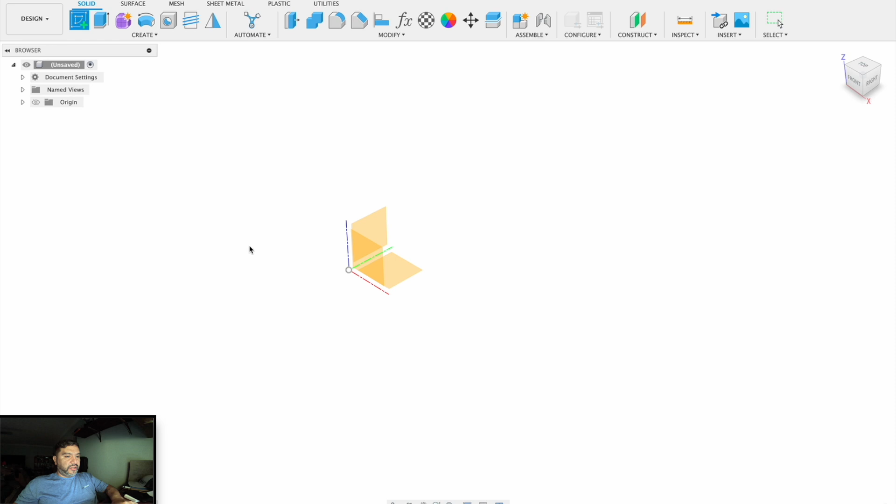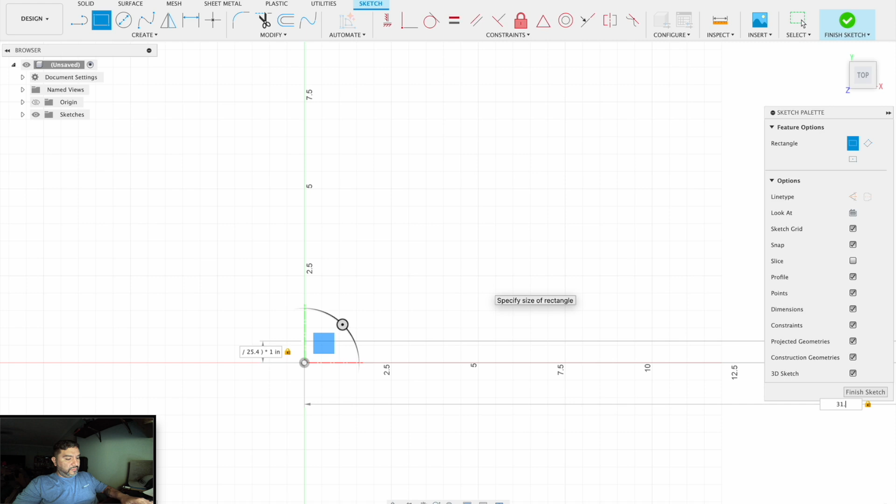The brick is a 2x4 brick, and it's in metric, so I'll be converting it to English. Short side is 15.8 millimeters divided by 25.4. Long side is 31.8. That is our rectangle.

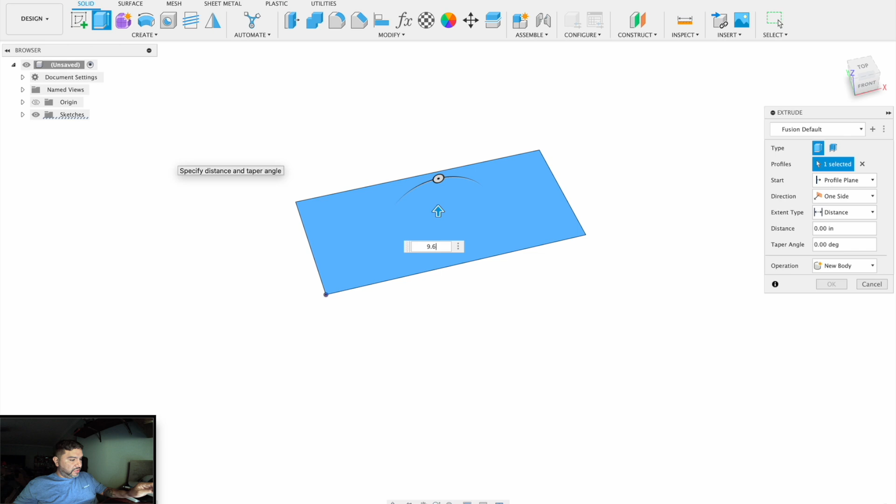We are going to extrude it first, we're going to extrude it up, and that dimension is 9.6. 9.6 in English, not metric, divided by... 25.4. Alright, there's the bases of our brick.

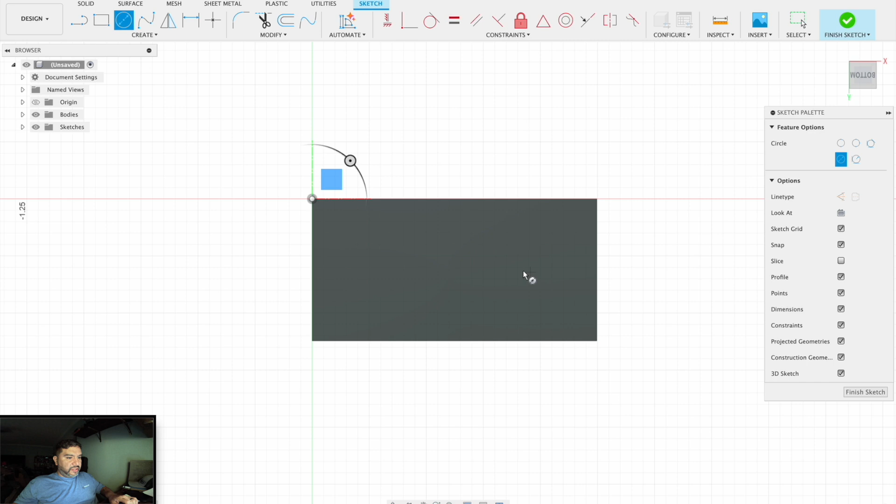Now I'm going to cut the bottom out, and the bottom dimensions are listed on this sheet. Use new sketch, select the bottom. There's a circle in the middle, so we'll drag our cursor till we get the triangle. We'll drag the other side until we get the triangle as well. When they meet, you get two lines. You're in center.

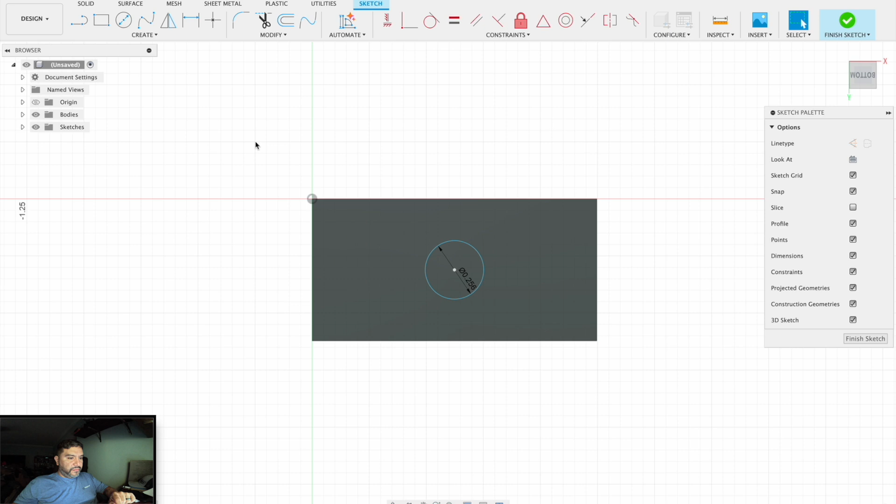Now we're going to make a circle, 6.51 divided by 25.4. Okay, you ever seen the bottom of a Lego brick? You see these circles? It'll be obvious when I finish it. Another circle, same center line, 4.8 millimeters. Okay, so we have that.

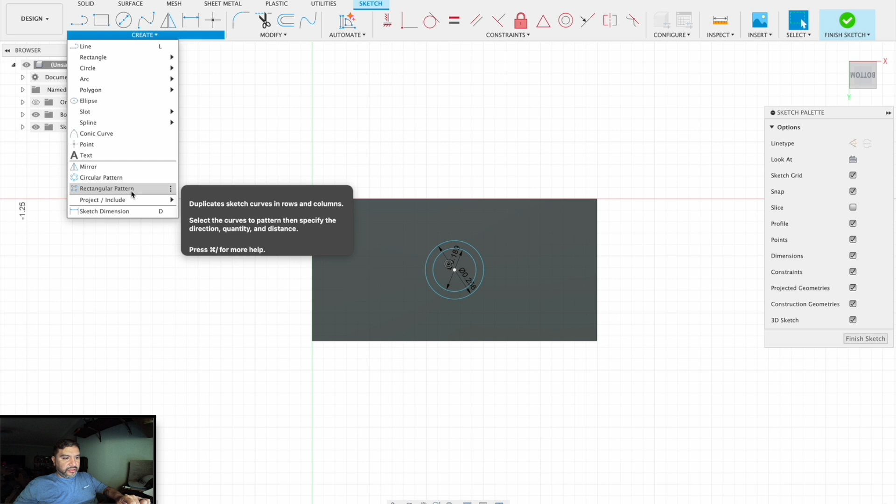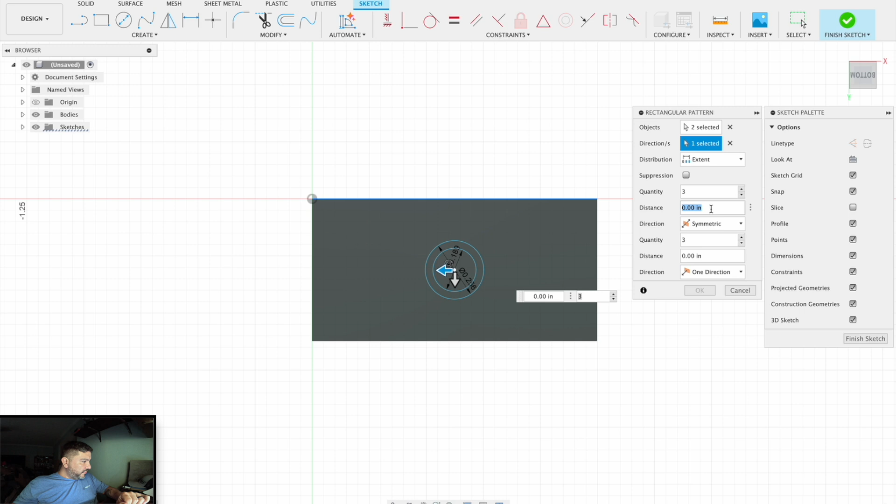Now we need 3 of them, so we'll do a pattern, rectangular is fine. Select both of our circles. Select a direction - in the direction you want, select a line that's going in the direction you want. You see the arrow here. We want 2 directions. Our distance is 8 millimeters. So we end up with that.

3 circles. I'm not going to go into the full detail of the bottom, but it'll be obvious what we're doing. Now we need to add a shell around, and the shell is 1.2 millimeters.

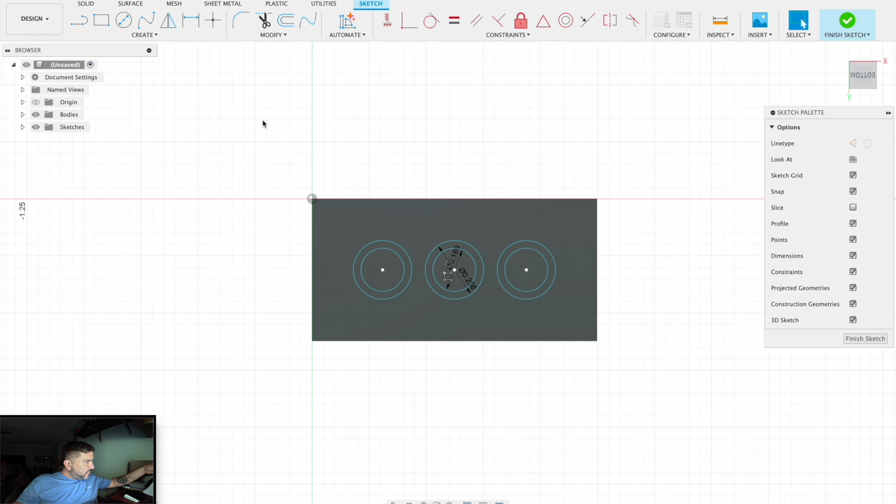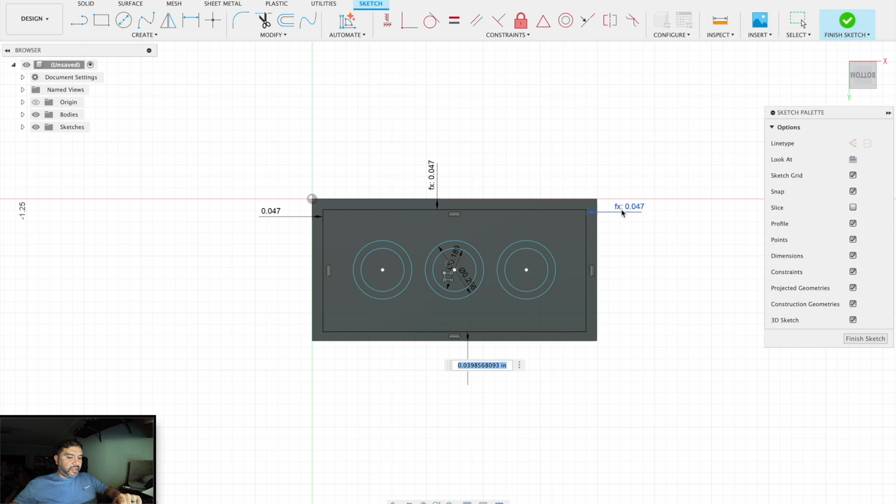Okay, so we'll take this rectangle tool again, make a rectangle here, and it's 1.2 millimeters, 1.2 divided by 25.4. Alright, and the rest of them are the same, so we'll just grab the 2 geometries we want, select the first dimension, and the FX will reference that. Same thing with the other side. Enter, and the last side. Enter. It can be any one of these other dimensions that are the same - they all reference the original dimension.

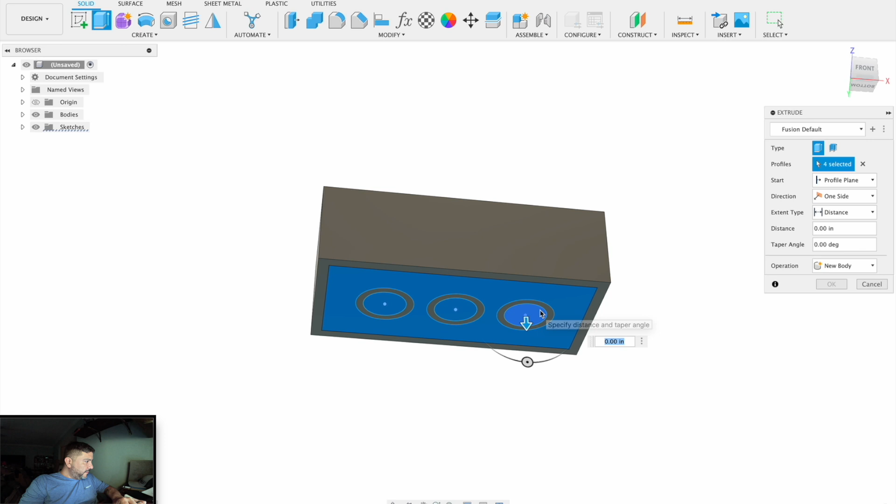So now let's pull that, or cut that area. We're selecting this. We also want to select these insides of these cylinders, and that goes...

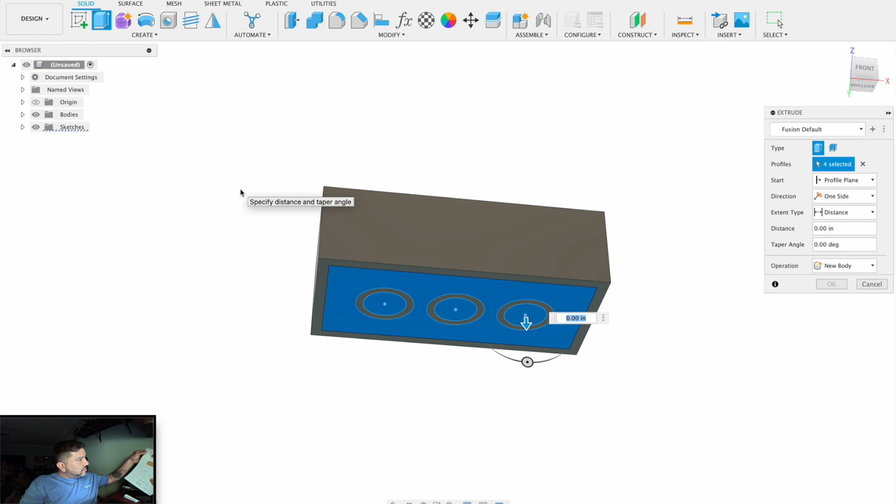It doesn't really say, but let's try 9.6 minus 1.2. Oh okay, so 9.6 minus 1 millimeter. Okay, 8.6 millimeters minus 8.6. Let's redo that. 9, negative 9, minus or plus...

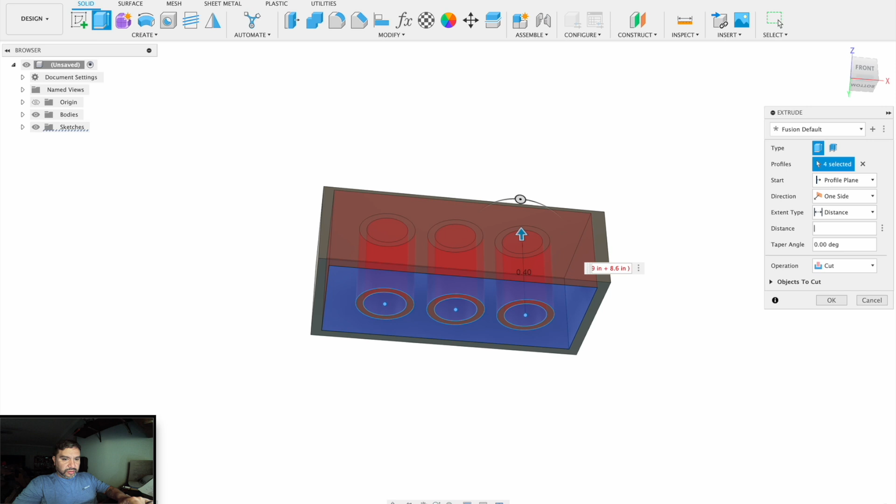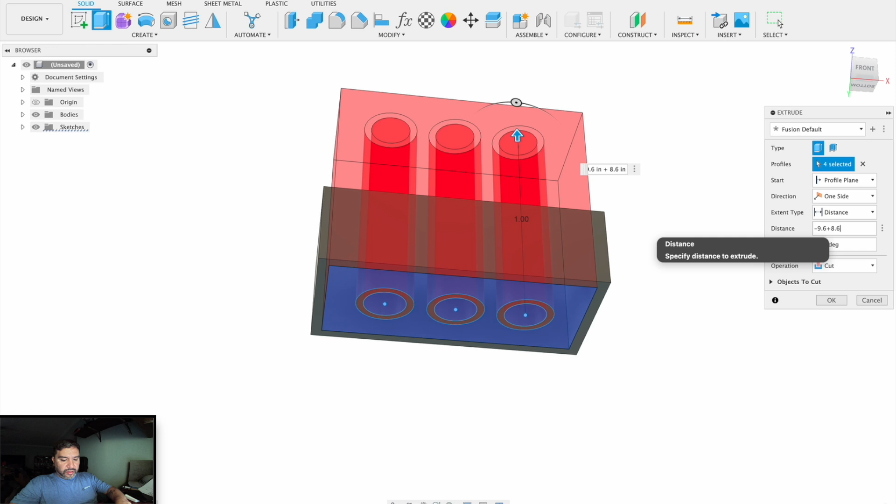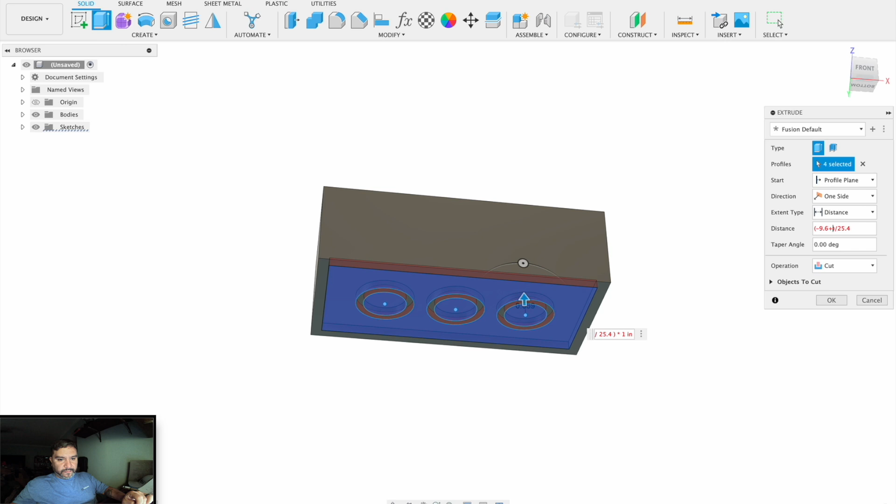8.6 millimeters. Let's take that, put a parentheses around it, divided by 25.4, which is weird, it's not changing. 6. Oh. Not sure what's going on. 9.6 plus 8.6 inches. Divided by 25.4. Not sure why I'm doing all of that - that's what we're doing. Okay, could have just did 9.6 minus 1, would have been 8.6 deep, not all the other math. But we have the inside of a Lego.

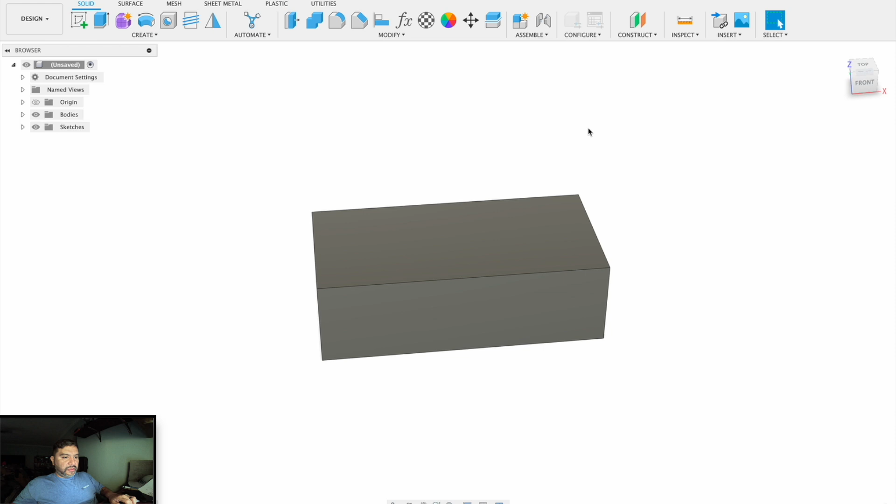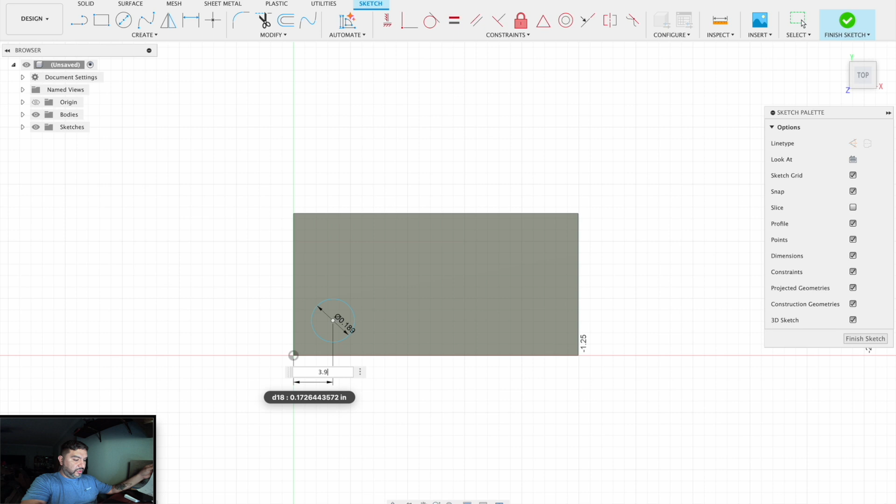So let's make the top cylinders. We'll scroll to the top with a new sketch, and we'll take one cylinder, and one cylinder is 4.8 millimeters, and it is 3.9 from the edge. 3.9 divided by 25.4, and then the same distance both ways, 3.9 and 3.9. So we'll just select the other one.

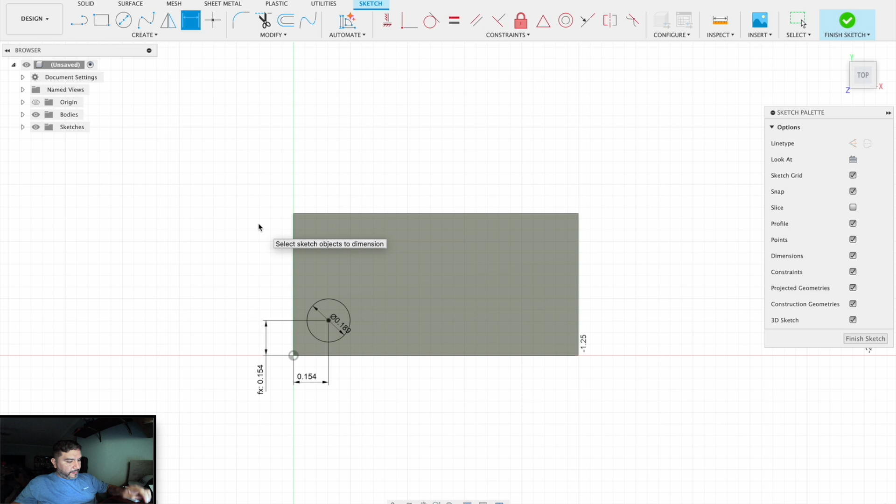That's good, and the little castle thing is 1.8 tall. So we'll go extrude, select that, and we're going 1.8 millimeters up. 1.8 divided by 25.4. There's 1.

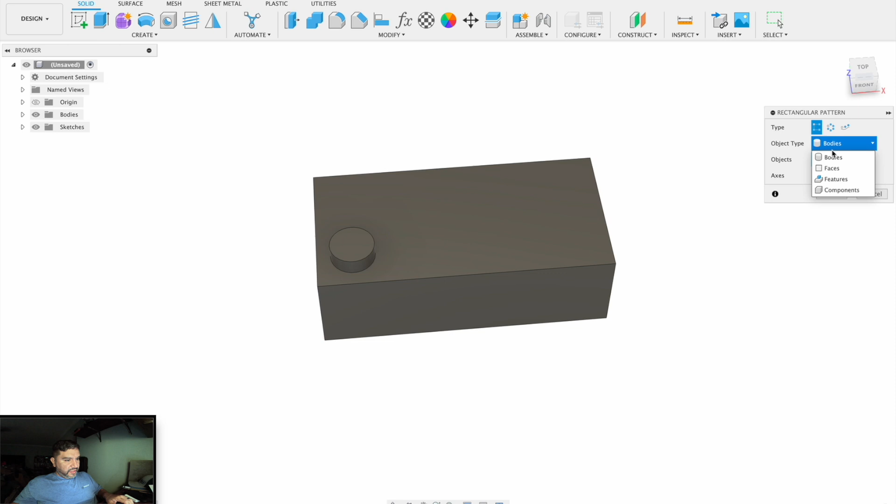Now we'll do another pattern, rectangular. We'll select faces - select the top face and the side wall. And the axis, this axis. And we want 4. We want the spacing to be 8 millimeters.

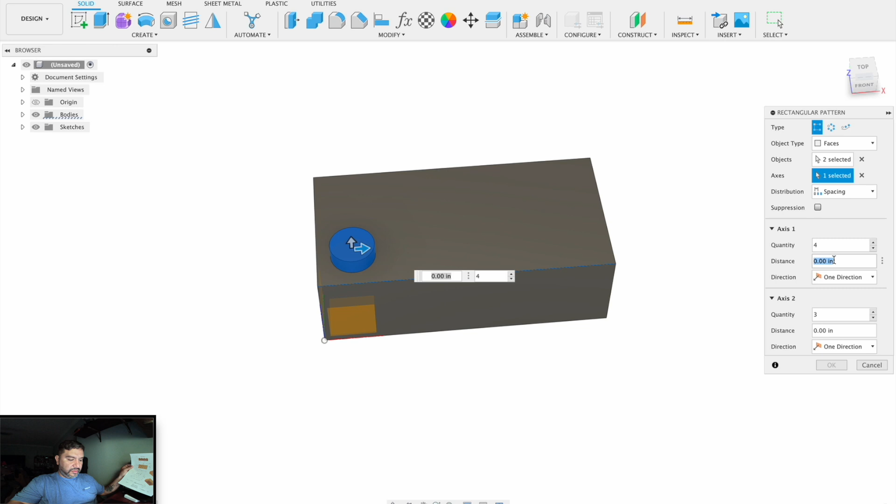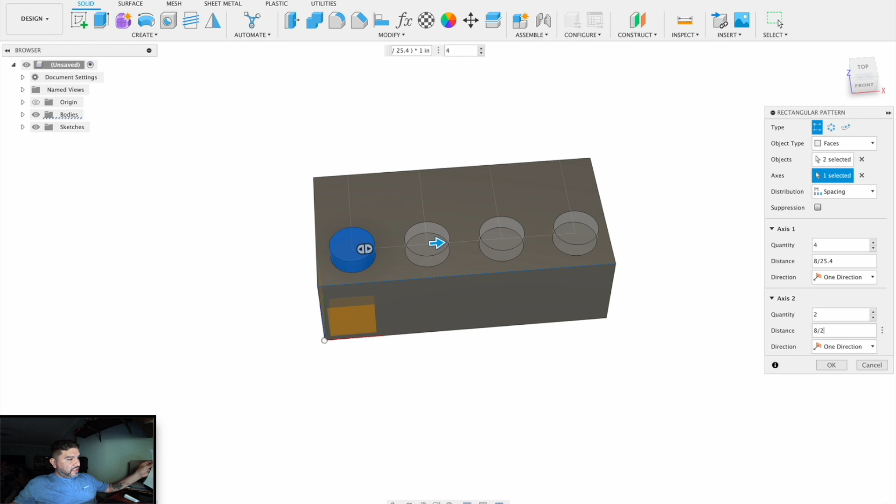Okay, now we want 2 the other direction, and that's going to be also 8. So 8 divided by 25.4. There's the top of the Lego brick. That pretty much is it. That's one simple 2x4 brick. Let's color it, make it an actual component.

So what I did there was go to the bodies, select the body you're talking about, and make it a component. Usually with components you can do a lot more things than just having regular bodies.

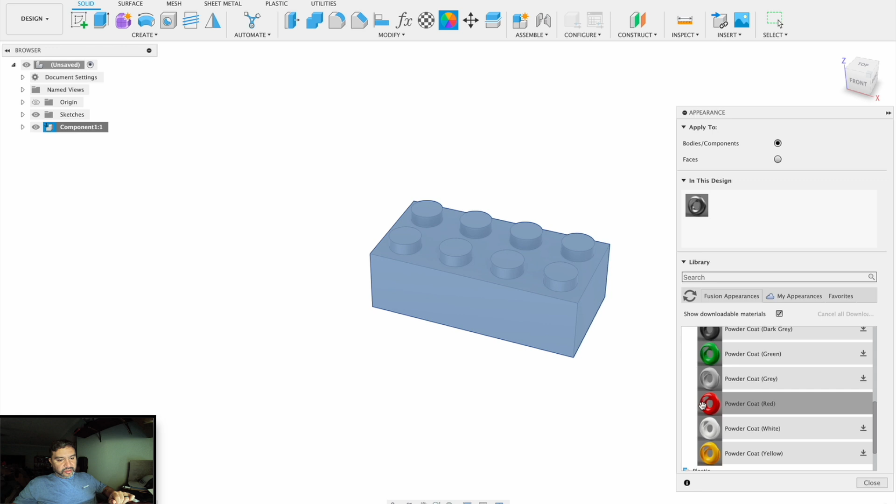We'll take that, right click and go to physical appearance. Let's make it a classic red brick. We'll go to paint, and powder coat smooth, a red brick. Download it. See a little hand? Grab that and drag it on top of your component. Now it's red. That's great.

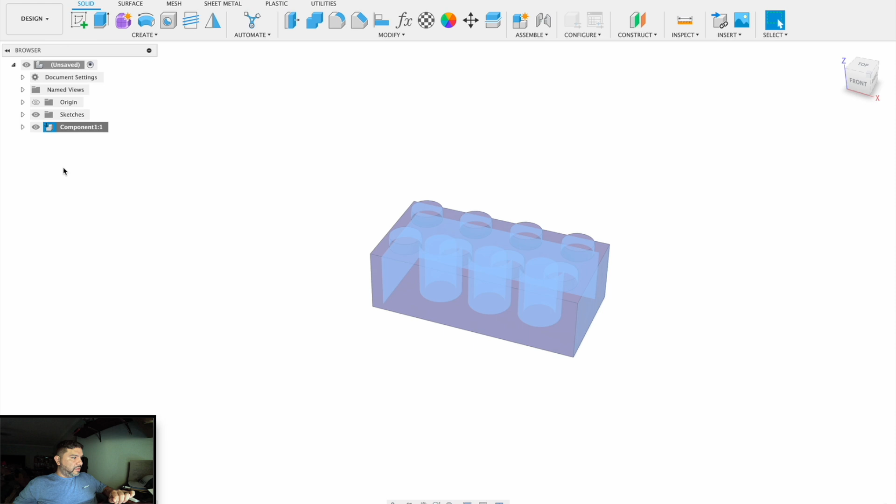So let's duplicate this part. Right click on the component. Copy. Just underneath it, right click again and go to paste new. You don't want to just paste, because all the changes you make to the first one will go to the second one if you don't paste new. Paste new makes it a separate component.

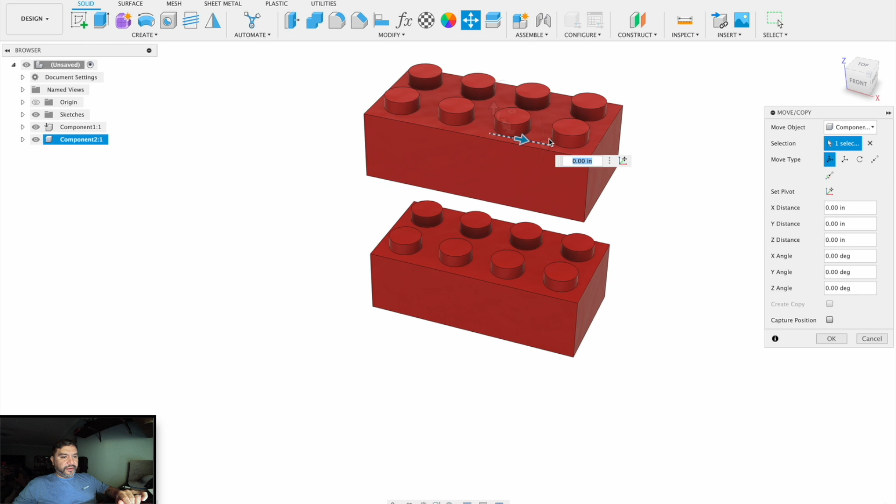Drag your arrow up and over. Let's make it some way out here. Press OK. Now we have 2 bricks in space, which the point of this video is to align things.

So let's take the cursor and go to align. It's this little icon with 2 different color bars, and you want a component. I guess you can do bodies in there too, so we didn't have to do that component switch. You want to align this edge to this edge. Now when you look at them on the side, they're lined up perfectly.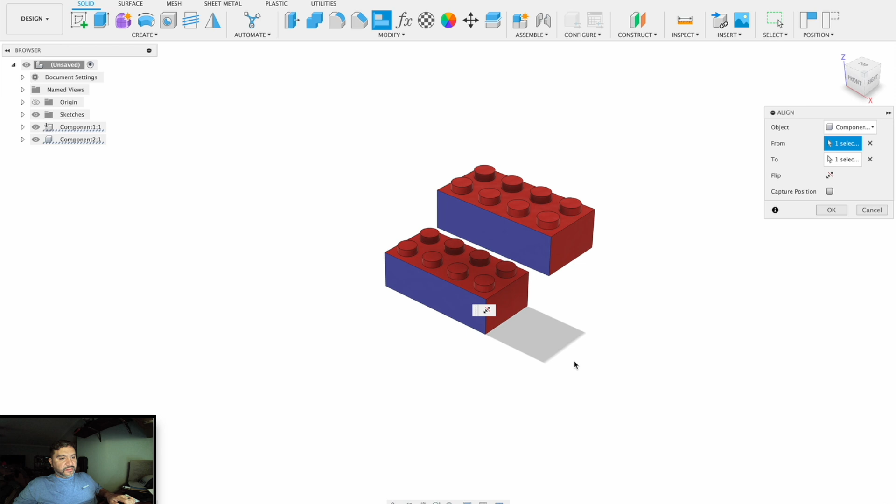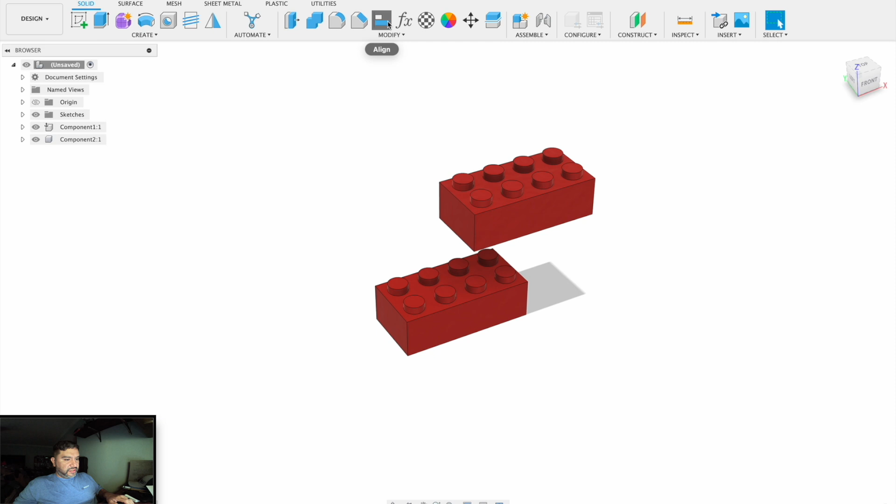Capture position, press OK. Now let's move over. Now I want to say 8 millimeters, but we'll align this other side up first. Press align again, this surface to this surface. Capture position, press OK. Now let's move that surface.

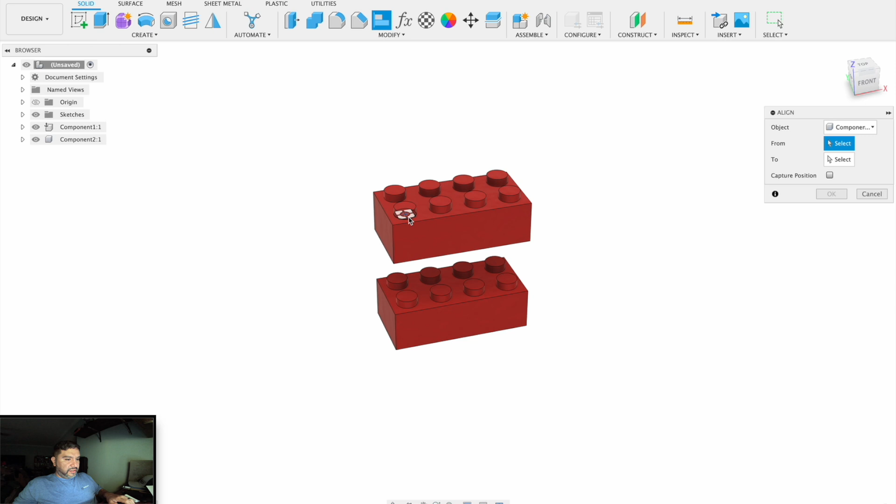Actually, no, we can do a better way. Let's align this cylinder with this cylinder. Now they're right on top of each other, but we can move them. So let's move this whole tile, this whole brick up, and you can go way out to clear.

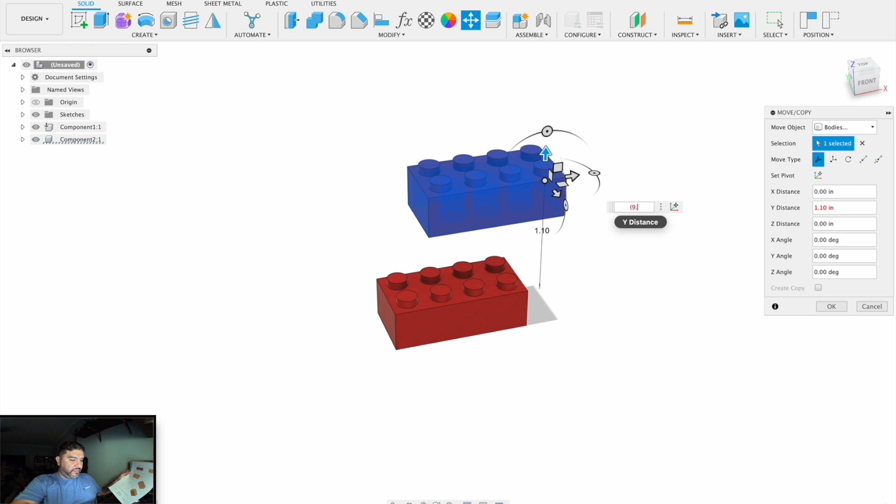Since the 2 bottom planes were aligned, we can go up the amount of the brick, which is, let's do parentheses, 9.6 plus 1.8. Actually, all we need to do is go up 9.6. 9.6 divided by 25.4. Press OK. Now, with those tools, you have aligned this brick.

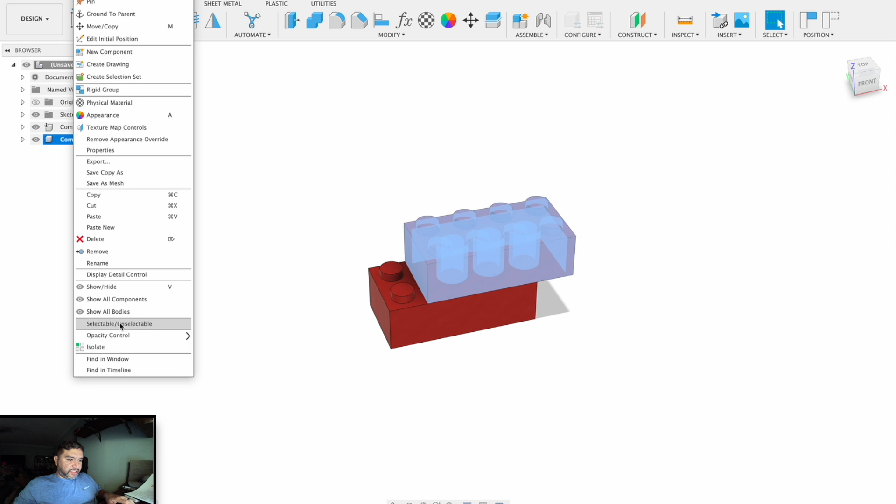And we can see the insides. If we right click and go scroll down to opacity control, let's go to 70%. You can see the other brick through the top brick. Let's make that a little clearer. Let's change this color to something else. Let's change this one to a clear tile.

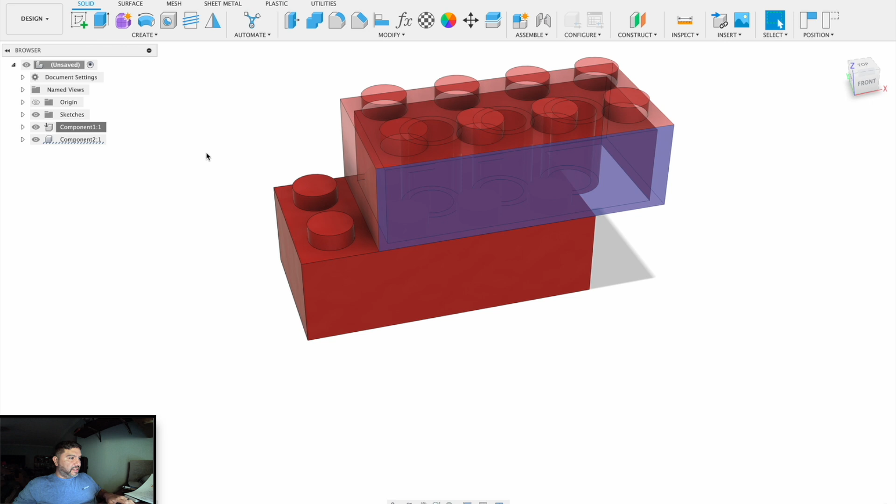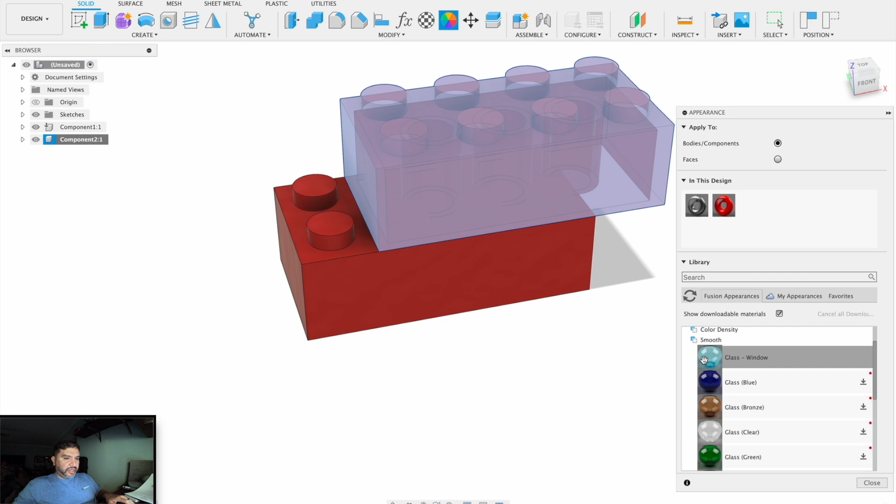Let's say like a glass tile. So appearance, we will close this, go to glass, smooth glass. Glass window sounds great. That clear one looks like something out of the Lego box. Download it, drag it to that tile, that little brick, let go, and close. Now we have a glass tile.

Let's make the opacity 50%. That looks great. It's lined up from the top.

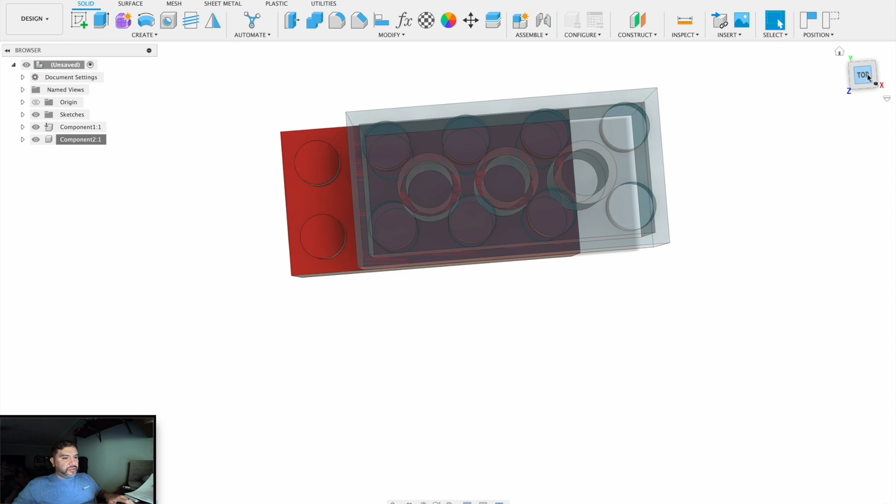Those are some of the tools you can use to align 2 assemblies together. Usually you will have some face that lines up with another face, like you have a shaft and a coupling. 2 cylinders have to line up, an ID and an OD. Maybe that butts up to a wall. Use the align, use move. You can move it around however you need to. It's not done until it's right. But that's how you align some parts together for an assembly.